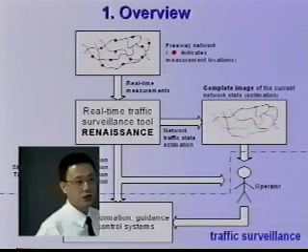Except for traffic state estimation, this tool can also perform a number of other traffic surveillance tasks, for example traffic state prediction, travel time estimation, travel time prediction, queue tracking, and also a little bit of incident alarm. I will explain more clearly later.

Once we have such information, first of all this kind of real-time information can be given to the traffic operator for real-time decision making. Also, this information can be used for further operations for the freeway network, for example route guidance, ramp metering, speed limit control, and so on.

But within this work, we focus on the task above the blue line. So that's a general idea of real-time freeway network traffic surveillance.

Following such an overview, I will quickly describe the mathematical model we use, and introduce the addressed real-time traffic surveillance tasks. Then I will focus on real data testing of the traffic state estimation task, which is the major task of the whole tool. Afterwards, if we still have time, I will present some simulation testing for the other traffic surveillance tasks. Finally, an outlook is given.

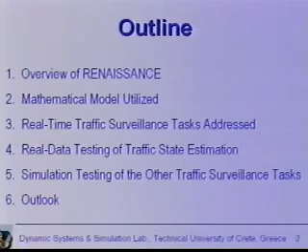So the mathematical model includes two parts: the freeway network traffic flow model, based on traffic flow theory, and also the real-time traffic measurements model, based on the electronics of the measurement devices. First, the network traffic flow model.

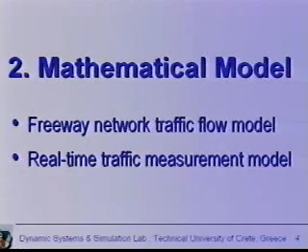As we know, any freeway network only includes two kinds of elements: the links, which represent freeway stretches, and the nodes, which represent bifurcation locations, on-off ramp locations, and so on. So naturally the traffic flow model includes two parts, the link model and the node model.

For the link model, if we have a long freeway stretch, we define it as a link within the model. We separate the link into a number of parts, which we call segments. Each segment has a length of about 500 meters.

In order to describe traffic flow dynamics within every 500 meters, we use our model based on two variables: the density and the speed of the segment. Density means how many cars are there in the segment at each time moment. Speed is the average speed of all the vehicles within one segment at each moment, and these variables are updated dynamically.

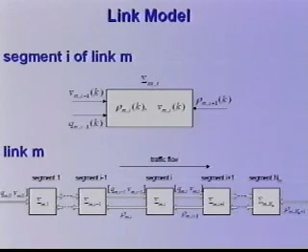Based on these two variables and also some boundary variables, we have our mathematical model to describe traffic flow dynamics of the segment. Once we have such a segment model, the whole link model is just a chain of segment models interconnected with the boundary variables. That's the general idea.

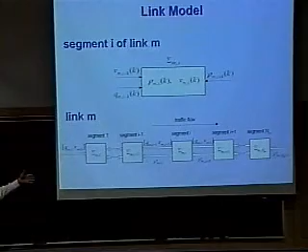First the segment model, because the link has a number of segments, then we have the whole model. This is the mathematical description of the segment model, which has a conservation equation, a flow equation, a speed equation, and a fundamental diagram.

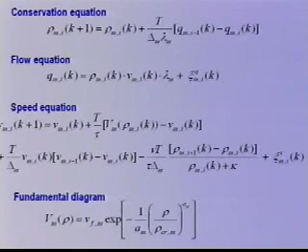For the moment I'm not going into detail. After the presentation, if you are interested, we can come back to it. I believe if the results are interesting, people would feel interested in the methodology. Otherwise, the methodology itself doesn't make sense. So let's first focus on the results. If you like the results, then we can talk about the methodology.

Within the fundamental diagram, this is important. We actually have 3 model parameters: free speed, critical density, and capacity. All these parameters are not only parameters in terms of mathematics; each parameter has its own clear physical meaning.

For example, free speed. What is free speed? Free speed is when we drive and our driving behavior is not influenced by any car in front. That speed is the free speed. Free speed, of course, is kind of a mean speed because everyone has a different speed.

Just now I introduced the link model. Now of course we have the node model. It's kind of very simple: traffic flow reaches a node via a number of entering links, and leaves a node via a number of leaving links. So the idea is very simple.

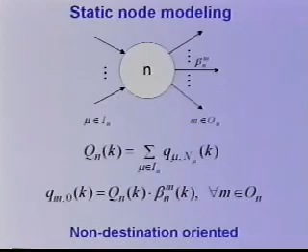So the whole model includes a number of variables, for example the density and speed of each segment, the origin flow and origin speed, the destination density, the turning rate at a bifurcation node, and the exiting rate at an off ramp, and so on. We call these boundary variables. Then we have some model parameters like free speed, critical density, and capacity.

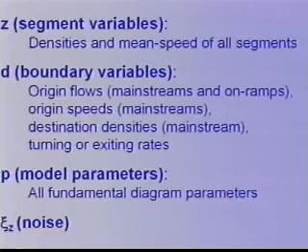If we define some vectors to include these variables, we can express our model in a very compact state space form. Then if we do some simple transformations, we can write the model in an even further compact form. So that's the traffic flow model.

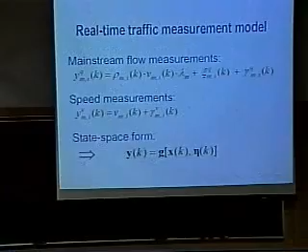For the measurement model, it's very simple. The idea is the following: the flow measurement is from the detector. The flow measurement equals the real flow plus measurement noise. The speed measurement is the real speed plus measurement noise. That's the measurement model. Also, the measurements can be written as a function of the flow and the speed, in a compact form.

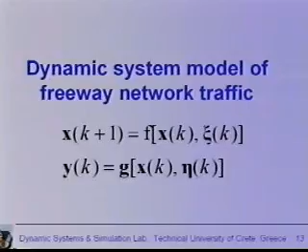So then we got such a compact form of the model. We have the traffic flow model, we have the measurement model. So that's the model.

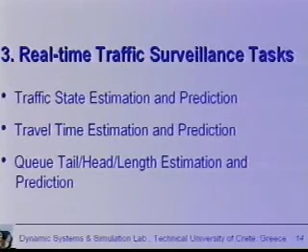Now I will talk about our traffic surveillance task—what kind of traffic surveillance task we want to consider. I have already mentioned we want to consider traffic state estimation. Except this, we also want to consider traffic state prediction, and queue tail and head length estimation and prediction, and so on.

For traffic state estimation, it means we want to estimate flow, speed, and density for any location where no detector is installed. This work is done based on the measurements from locations where detectors are installed. Actually it's a kind of information reconstruction—based on incomplete measurement information, we want to construct a whole complete image for the whole network.

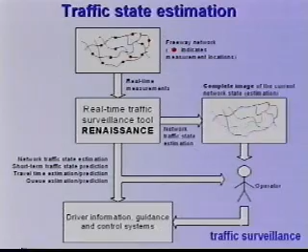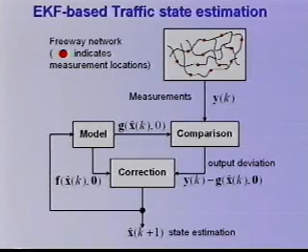Since our model is this kind of nonlinear dynamic model, in mathematics, to do state estimation for such a model, it is very straightforward to use a Kalman filter. I don't know whether you are familiar with the Kalman filter, so I may come back to this point in detail later. The major idea is the following: we take the measurements, the measurements go through this mathematical tool, and the tool delivers the estimation results.

For travel time estimation, because we can estimate traffic speed for each segment along a certain route, the travel time estimation is simply calculated based on the traffic speed estimation, which is a very straightforward calculation.

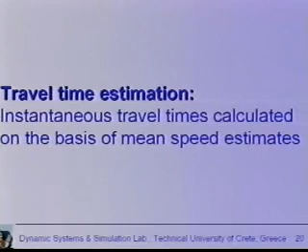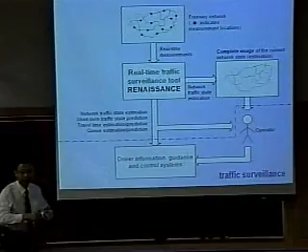For the queue head and tail length estimation, the idea is quite simple. Imagine we have many routes, and we want to know whether along this route there is any congestion or queuing. The idea is: because we can estimate the speed along any route at a spatial resolution of about 500 meters, we can display the speed over the distance.

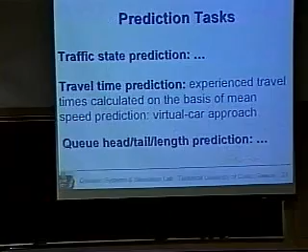For prediction, it's a different story. For example, traffic state prediction means we want to predict speed, flow, and density. For example, we are at the current moment, and we want to predict for a certain location in the future, in the next 20 minutes, what will be the speed and flow. That's prediction - it means predicting into the future. We don't know what will happen, but we want to use our model to predict it. If we can predict the traffic speed, we can also predict the travel time along a certain route. Similarly, if we can predict the speed, we can also predict what's the queue in the future.

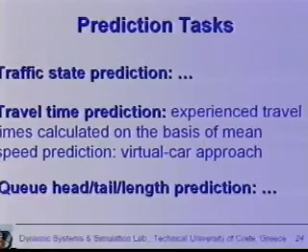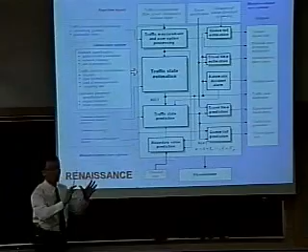This is the functional structure of this tool. The tool has a number of modules, each corresponding to certain traffic surveillance tasks. We have real-time input and a lot of user options - any tool offers options so the user can decide how to use it according to their specific needs. The tool produces a number of tasks, actually a lot of data files. We also have a GUI, a graphic user interface, which can visualize the real-time traffic surveillance results. I have some examples later you can see.

So I quickly went through the general idea of this tool and the tasks we would like to do. Now it may sound a little abstract, so via a number of real data testing, things may become more clear.

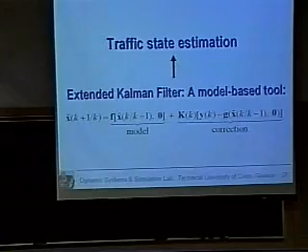The first task is traffic state estimation - real data testing of the traffic state estimation. As I said, we use the extended Kalman filter for this work. The extended Kalman filter is a model-based tool, meaning we have our mathematical model, which I already introduced, and the real-time measurement is also used. Based on both the model and the measurements, we produce the estimation. We just want to see whether this kind of estimation is accurate - we have to evaluate it. Since the model is involved, it's important to decide how to deal with the model parameters.

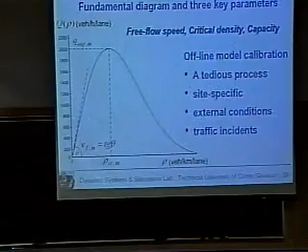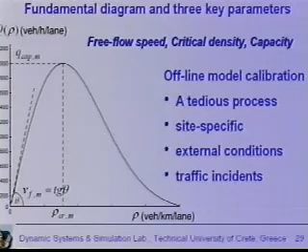We have 3 parameters: free speed, critical density, and capacity. These parameters differ from freeway to freeway. For this freeway, the free speed, critical density, and capacity are those values. If we turn to another freeway, the corresponding values will change - there are no constant values. Generally speaking, traditionally, even until now, these parameters are identified via so-called offline model calibration, meaning you have a model where only the structure is fixed, but the parameter values are uncertain. How do we define the parameter values?

We have to take a lot of real data from a certain motorway, then use a certain mathematical approach to find out the best parameters for this freeway, corresponding to that real data. Whenever we do the same work for another freeway, we have to take other data from that freeway, and we'll get different values. That's the general way it's done.

We are talking about the macroscopic traffic flow model - for car following models, there's a lot of this kind of calibration work, because that kind of model may have 6 or 8 parameters. Here, the macroscopic model only has 3 parameters, so it's relatively easy, but still has a lot of problems. First, this calibration is very tedious and time-consuming. Second, once we get values for one freeway, doing the same work for another freeway requires redoing all the calibration work. And even for the same freeway, these parameters are not constant - they may change according to environmental conditions.

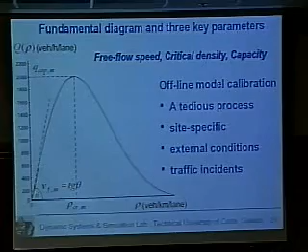With an incident, for example, we have a 3-lane freeway. Suddenly 2 cars collide at a certain location and one lane is blocked temporarily, creating a local bottleneck. Then the capacity there, the maximum traffic flow that can be reached at the incident location, will definitely go down. So the parameters you see are not constant. So we believe offline model calibration is not a good way.

We would like to do online model calibration, or online model parameter estimation, meaning we estimate flow, speed, and these model parameters simultaneously, so we don't need any offline model calibration. If you remember, in the vector x, this is what we are going to estimate—it includes flow, speed, and the model parameters. So all the variables are estimated simultaneously. That's the ambition, that was our original ambition.

That's why for the first real data testing, we want to see whether we can avoid offline model calibration, whether we can be adaptive to changing external conditions, and whether we can enable incident alarms via online model parameter estimation.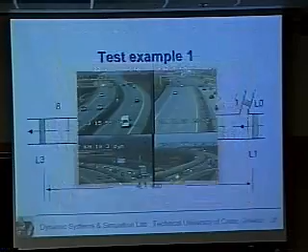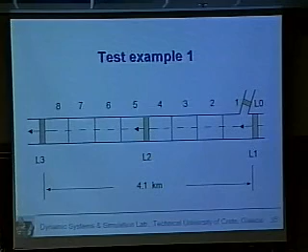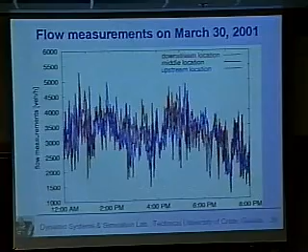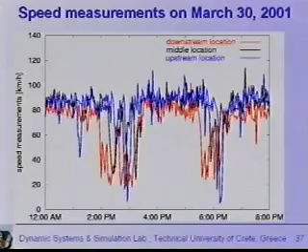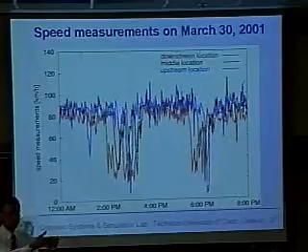From this speed drop sequence, we can see there was heavy congestion coming from downstream, which first reached the downstream location—that's why the first speed drop was measured there. Then, with the congestion propagating upstream, it was measured at the middle location, then at the upstream location. This is the general way traffic congestion propagates. Once congestion is created at some location, it propagates upstream—we have this experience when we drive, right? So this congestion is coming from downstream.

We want to evaluate whether our traffic state estimator can work accurately. So the evaluation plan is the following: we have a 4 kilometer stretch, separated into 8 segments, each about 500 meters long. We feed our estimator with measurements from the boundary only. We want to estimate speed, flow, and occupancy for each segment.

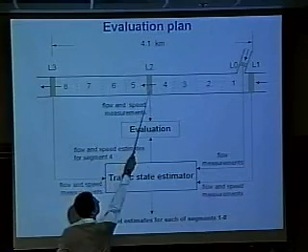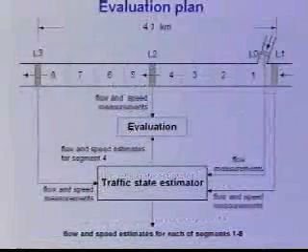Since we also have a detector in the middle, the measurements from this detector were not used to feed the estimator. That's why we can compare our estimation for segment 4 with the measurement here. If the results are good, this means the estimator works well, because this comparison is objective—the corresponding measurements used for evaluation were not used by the estimator.

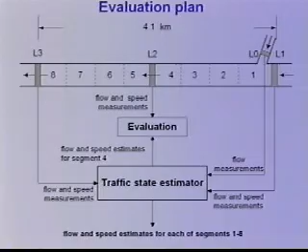Since I mentioned model parameter estimation, we always combine the two work together. First, I do this kind of testing—I want to see whether the model parameter estimation has to be estimated online. I choose three groups of model parameters: free speed, critical density, and capacity.

Meaning I will run the estimator 3 times, each time with these parameters fixed at these constant values. I want to see what will be the results. So that's the result.

Meaning, if we don't do anything for the model parameters, if we use constant model parameters, only with the first group of model parameters does the estimator work well. Here the red curve represents the real measurements. The black, the green, and the blue represent the corresponding estimation results.

Only with the first group of model parameters can the estimator work well. This means: if we want to keep the model parameters constant in the model, these model parameters have to be identified very well. You cannot blindly specify some model parameter values. If we do so, then the results are simply not good. That's why we say if we don't do anything for the model parameters online, these model parameter values have to be identified well offline.

That's why a lot of offline model calibration work has to be done. These results are actually based on the parameters from the offline calibration. All other parameters were blindly given by me just for testing, meaning only this group of parameters was from the offline model calibration. I did a lot of this kind of tedious calibration, which is very time consuming.

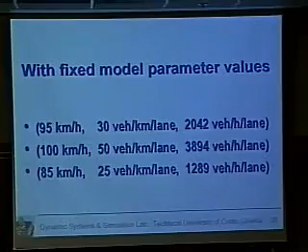Those parameters, as we can see, are very different. I just, for testing purposes, specified them arbitrarily. But this gives us a strong indication, right? But now, with online model parameter estimation, meaning I don't do offline calibration, I estimate all the parameters online.

But in this case, I still use these 3 groups of parameters, but use them as the initial values. With online model parameter estimation, the parameters can change automatically from the initial values. Then we want to see what will be the results. Again, the same 3 groups of parameter values as the initial values.

So that's the results. For example, this is free speed - we start with 3 different values. That's the capacity - we start from different values. That's the critical density - we also start from different values.

With the same mechanism, online model parameter estimation, each model parameter estimate finally goes to the same value, although they start from different values. Why can they go to the same value? Because the real model parameter information is already contained in the real measurements. It is driven by the real measurements. The estimator is driven by the measurements.

So with time passing, the real parameter value is identified, regardless of what the initial value was. This means with online model parameter estimation, with time passing, the real value can be identified. And also this real value - whether the real value can be reached is not sensitive to the initial value. So this is very good.

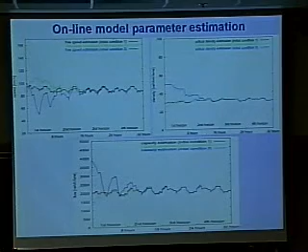Meaning, in general, traffic operators and traffic engineers at the site don't have very accurate knowledge about model parameter values, although they work every day for a certain site. If you ask them what would be the free speed or capacity for that site, they may not know. So this gives them convenience - they can specify initial parameters relatively blindly, then just run the tool. The tool will help them automatically find the real value.

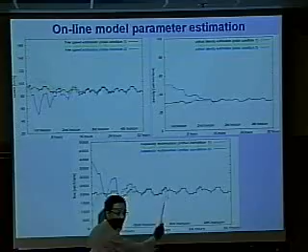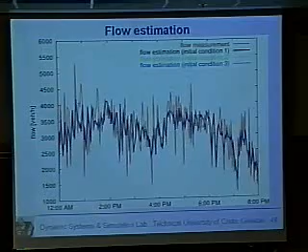Then the question comes: once such convergence is reached, what will be the speed and flow estimation results? That's our focus. So that's the speed estimation results, and this is the flow estimation results. We may come back later if some question arises.

The second test example is along the same freeway stretch. Actually, the one I just presented is from this on-ramp until the end, but the current one is longer than that. This is an interesting test example from February 11th, 2004. As we can see, this is 24-hour data from midnight until midnight. So here we have speed and we have flow.

This is an interesting example in the sense that we can see from midnight, 0 o'clock, until early in the morning, 6 o'clock, 7 o'clock, there was a clear speed decrease. Clear speed decrease. But at the same time, the traffic flow was very low.

So then we would like to ask ourselves, why in the night there was almost no flow, but the speed goes down clearly. And the speed here is even lower than speed here, corresponding to the afternoon peak period. So this was a little strange to us.

For this reason, we consulted the Munich Traffic Authority. We found out with their help that from around 10 o'clock at night until 7 o'clock in the morning, in the whole Bavaria area, including Munich, there was a strong snowstorm. So then it became very understandable - due to the heavy snow covering the freeway and the strong wind, the driver was not able to drive fast, although at that time there was not much traffic flow, right? So this reflects the impact of the weather condition on the traffic flow characteristics.

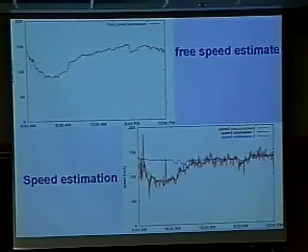So that's the second example. Via this example, we want to show how the estimator, using online model parameter estimation, can handle the traffic flow characteristics under weather condition impact. And we have the third example.

The third example is the incident example, which was from April 18, 2004. That's 24-hour flow measurements, 24-hour speed measurements. As we can see, we have speed drop to almost 0 kilometer per hour, and we have a flow drop, which dropped to also 0.

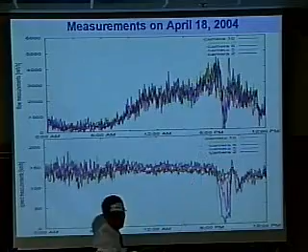Whenever we have a flow drop to almost 0, this means an incident - meaning there was something so that the flow was not moving. This can happen only under the incident condition. But if we have a very low speed, this doesn't mean something - this could be due to congestion. But whenever we don't have flow, this means incident. So we would like to see how is the performance of our estimator under such incident condition.

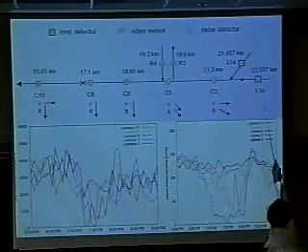Actually, I did the data analysis. So the general situation is the following: that's our freeway, from upstream to downstream. At this detector - okay, you see the whole stretch - different types of detectors are involved in this test example.

Here, at this detector, the speed doesn't change, but the flow dropped a little bit. Here, both speed and flow dropped considerably - both dropped sharply. And here, speed doesn't change, but flow dropped sharply. So even without traffic engineering knowledge, we can figure it out. Here, both speed and flow dropped sharply. Here, speed doesn't change - meaning what?

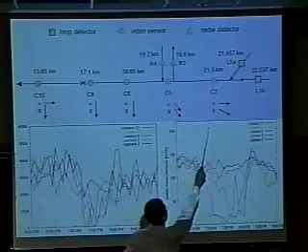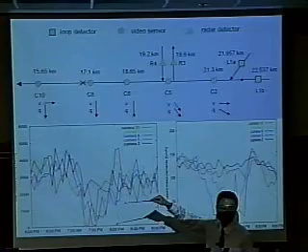Meaning something happened in between, right? That's why at the downstream of the incident, the speed doesn't change, but no flow coming from upstream, so the flow dropped a lot. But at the immediate upstream of the incident, both speed and flow dropped sharply. Then the congestion propagated until far upstream, where the speed was almost not too much influenced, because there are also off-ramps - a lot of cars actually exit because they saw downstream congestion, and a lot of cars choose not to use the freeway anymore at that moment. So that was an incident.

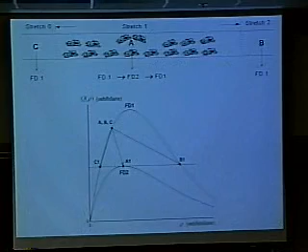There are some explanations based on the fundamental diagram, so I'm not going into detail. Actually, this is our critical density and capacity estimation results. As we can see, during the time period with the incident, clearly there was a capacity drop identified, and critical density drop identified. Indeed, because the flow was 0, the capacity was not 0, but the capacity was very low - a capacity drop, right? And if we display the derivative of both curves, we have these two figures - the derivative. So then we can see that around the incident moments, there was a very strong impulse, right?

So the impulse can be used as a kind of incident alarming signal, meaning the traffic operator, whenever they see something like that, this means something very abnormal has already taken place. So maybe some further measures should be taken. So that's an incident example.

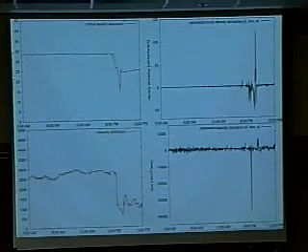Then we also have the corresponding flow and speed estimation results, which looks good.

So we have already demonstrated that with online model parameter estimation, first of all, the offline model calibration can be avoided. And also the estimator can be adaptive to the external condition.

Also, we got some preliminary evidence that incident alarms could be issued.

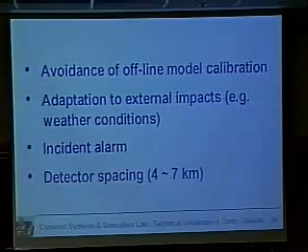Finally, I would like to mention that in the shown testing example, the detector spacing used along the mainstream of the freeway, the distance between detectors used was 4 to 7 kilometers, which is very long. Generally speaking, if we look at the literature, the detector spacing normally used is less than 3 kilometers.

If we can use detector spacing like 4 to 7 kilometers, this means much less number of detectors are really needed. We can do the job with very sparse information. This means a lot of money could be saved from detector installation. We don't need so many detectors.

If detectors have to be installed very densely along the freeway, first of all, maintenance is very difficult because a lot of detectors may be put underground. Once something happens, you have to open the pavement. That's very difficult work. But with fewer detectors, maintenance becomes easier, installation cost and energy support also become easier, and a lot of money could be saved.

So, 3 months ago, we also applied this tool to a freeway of 50 kilometers in South Italy, which is the hometown, old hometown, of Professor Bertini.

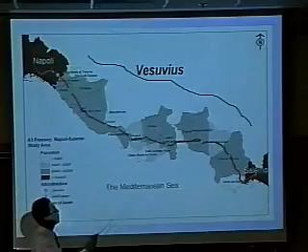So we applied this tool to this freeway of about 50 kilometers for two directions, for double directions. That's the detector installation at the site. So far we have already considered about 42 kilometers for both directions. We will soon extend it to the whole freeway stretch.

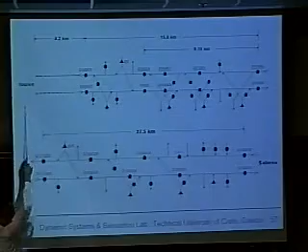Generally speaking, every morning a lot of people go to Napoli to work. So congestion is generally created in Napoli and propagates along the freeway. But generally speaking, there is no congestion in the Salerno direction.

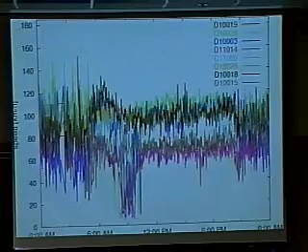And this is the Napoli direction. Clearly, some detectors detected heavy congestion, dropping to almost 0.

I have already mentioned the original ambition for this work is to offer a kind of complete image of the real traffic situation that can be used by the traffic operator. So what's a complete image? The complete image is the following.

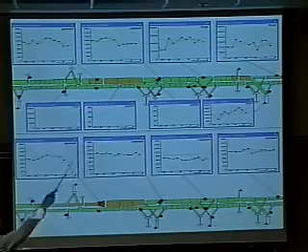From the screen we can see the general situation: free flow condition, dense condition, and congested condition. Each black node represents a detector, meaning we only have measurements from the detector; all the other things are estimated. As you can see here, early in the morning there are some dense locations, but there is no congestion.

The red curve represents the real measurements, and the green curve represents the estimation for this location. You see the speed dropped because the congestion is coming. The speed dropped, then the estimation follows.

So far, no congestion is measured at other locations, so no congestion is estimated at other locations. We can see the congestion here is coming. Then with time passing, here it already becomes very congested, and the estimated congestion shock wave keeps propagating to the upstream.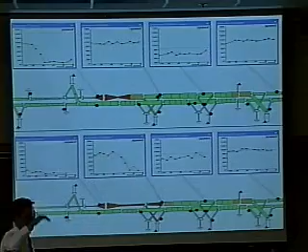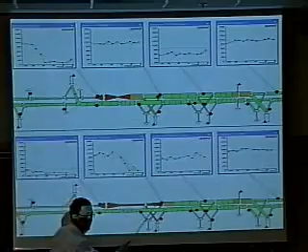First of all, now congestion didn't reach here, right? So both the measured flow speed and the estimated speed were high. Then, with the congestion propagating to the upstream, this is the estimated result. Now you see the measured congestion already reached this detector, so the estimated congestion also reached this location, right?

Then with time passing, the congestion was already dissolved here. Here the congestion is almost at the end, going to dissolve, and the speed is going up. But here the congestion is going to reach. So the next moment, indeed, the congestion already reached here, right?

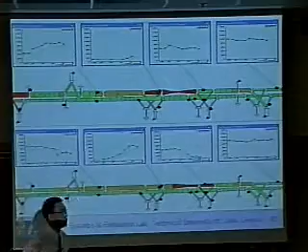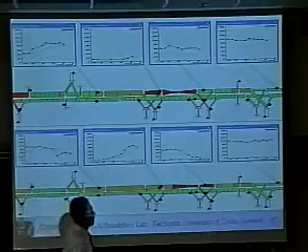What I want to say is the estimation results strictly follow the congestion propagation shown in the measurements. For example, if there is no congestion from the measurement, the red curve, you see the speed is 100 km per hour. If the estimation already shows congestion here, but from the measurement there is no congestion, this means the estimator is doing work in a fictitious way.

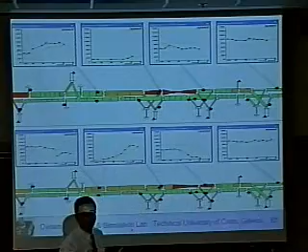However, here that's followed correctly. The congestion is measured here, and indeed the congestion is also estimated around this certain location. Here we see there is no congestion because the speed is already going up a lot, then the estimation result also goes up. So the estimation result follows the measurements.

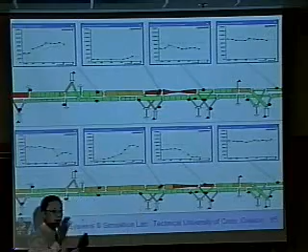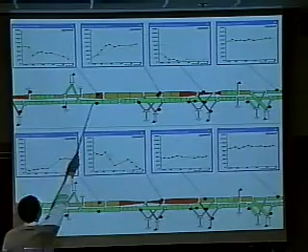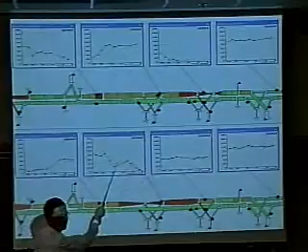Again, with time passing, there is even a second congestion coming. We can see from this figure now there is no congestion, but next time moment the congestion already reached here, which is consistent with the real measurements. So while making this kind of comparison, we can see the estimation results are somehow accurate.

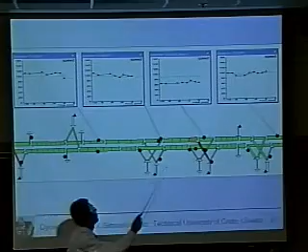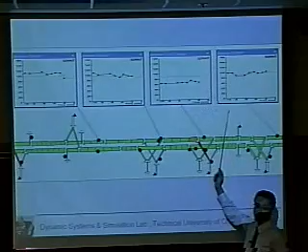Finally, all the congestion was dissolved. There's something interesting we can see here: without congestion at this location, the speed measurement here is clearly lower than the speed measurement at other locations. So we checked to understand why the speed measurement here is clearly lower.

We checked the information from the site and found there is no curvature, no upgrade, no tunnel, no lane drop. So there is no reason for speed measurements here to be lower than other locations, but we just don't know why. Most probably this indicates a detector fault.

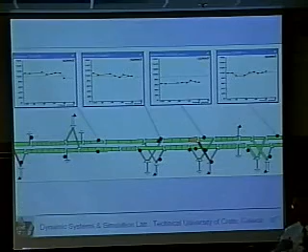When we use real measurements, there are a lot of this kind of difficult situations we can handle. The measurements are never accurate, so the detector sometimes has problems. A certain detector has a problem, so this could be a kind of measurement bias. So you see all this data, but we have to use them.

Also, a month ago, a German company, PTV, which produced the microscopic simulator VISSIM, wanted to use our tool for their work. So I did some testing for them. They gave us a freeway stretch example of 9 kilometers, and I got traffic state estimation results. As we can see, the measurements were not used by the estimator, so the comparison is fully objective. For example, the serious stop-and-go behavior is estimated quite well.

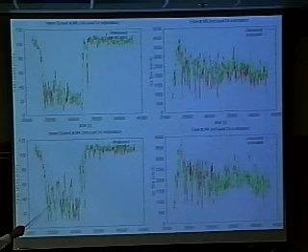I think we don't have time to go to other simulation results, because so far I have only presented the real data testing results of traffic state estimation. But we have a number of other tasks for which we don't have real data testing results, so I have a simulation example. Due to the time, I have already used 1 hour 50 minutes.

So perhaps I'm not going to the detail of the simulation testing results. Actually, I would like to mention, recently we published a paper in Transportation Research Part C, which includes all these simulation testing results. If you are interested, you are welcome to read that paper, so that we can exchange our opinions.

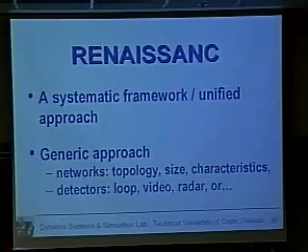I would like to get your comments, remarks, and so on later via email. So, yeah, we will produce such a tool. This tool has some major properties. It can handle a number of different traffic surveillance tasks under the same framework, in a systematic, unified approach. Also, this tool is a generic tool, which can be applied to freeway networks of any topology, size, and characteristics. It can handle measurements from detectors of different types.

So far, our work applying this tool to the Italy freeway is still underway. We haven't finished. So far, we only got the traffic state estimation results. They are interested in travel time prediction, for which we have to do traffic speed prediction. Perhaps in the future, I will have another chance to present the corresponding results.

And of course, this work was partially supported by the European Commission. We express many thanks, and thank you very much for attending this presentation. And now we have the question time.

Okay, please. I guess my biggest question is, is this an elimination of sensors, or the need for sensors, and is it a cost-saving type of thing for cities and municipalities? What type of savings are actually coming out of the estimation model? How much money, or what kind of money is saved for a municipality?

You mean the quantitative criterion? So far, we haven't done so. For example, what we know is, if we check the literature from before, traffic state estimation is not new work — it means this work was already done since early in the 1970s. But most of the work was done for a very short freeway stretch with a quite short detector spacing. If you check the literature, you will see normally they use detector spacing of 1.5 kilometers, 2 kilometers, 2.5 — I never see it go above. I never see detector spacing bigger than 3 kilometers.